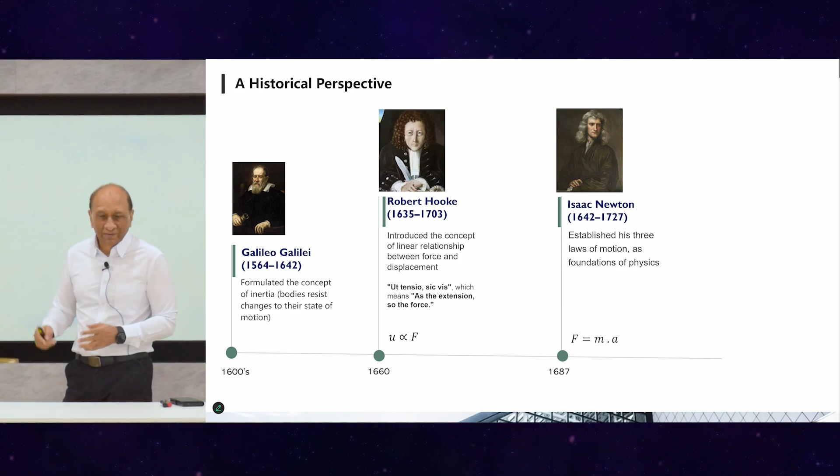And then came Newton. He formed almost the same time, different parts of the world, and formulated the first equation we all know, correlating his idea with the previous ideas, saying okay, force is actually acceleration, the movement are related by this function, that force and acceleration are related by mass, and they're related like this. This is of course the fundamental equation we all know now. This is the start of real physics in a way, and also engineering in some way.

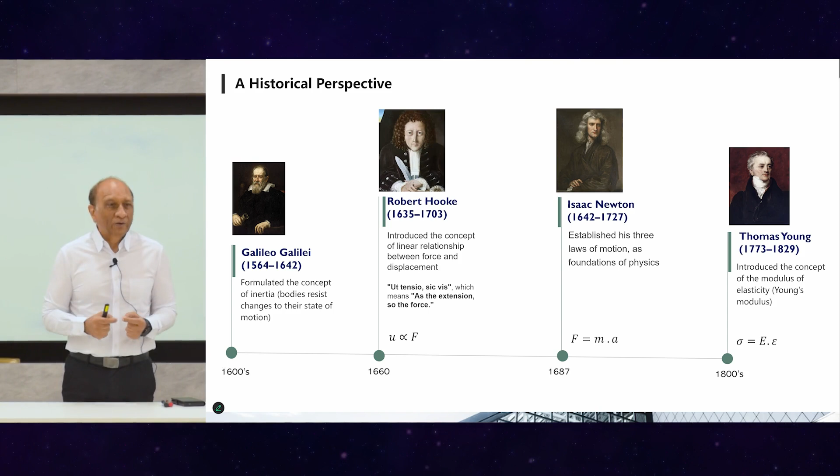And then this guy came nearly 200 years after that, a long time in history. Imagine, 200 years -- now it's 5 years, you can't even, 1 year you can't even read what's going on. 200 years passed between that idea and his putting this equation there, correlating stress and strain, and finding the Young's modulus as a relationship between them, and finally having an equation, finding that stiffness between that. So he started the same concept, but looked at stress and strain in a similar manner and came up with the relationship. This actually led to the equation F is equal to KU in a way, because this idea and that idea put together give us the equation, so-called Hooke's law, or the Hooke's equation, or the stiffness equation -- that force and displacement are related by stiffness, and stress and strain are related also by stiffness, called Young's modulus, or E. We discussed all these things in the previous class. This is just a quick historical perspective on how these things developed until the 1800s, and that's where things start to move very fast.

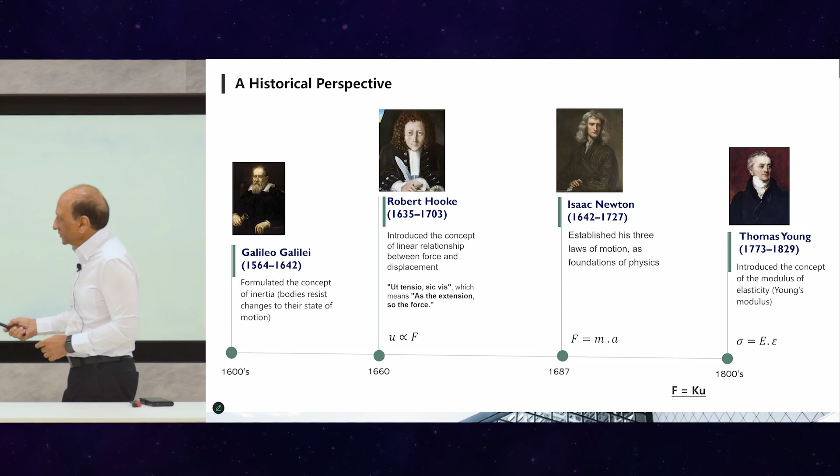Let's go back again. Let's look at a body -- I'm talking about physics now, 10th grade or 8th grade or whatever. It's moving as a mass, and if you want to move it from 0 to something, you will need to have some acceleration, and that is given by F is equal to ma. And A is a derivative of displacement. So now they're thinking about acceleration, but engineers are thinking about displacement, so we like to think about acceleration as a displacement derivative, second derivative.

And then we also have the displacement of a static system. This is a system in motion -- it's not in equilibrium, it's moving, so it's not equilibrium. And then we have the equilibrium where it is not moving, but we have the force here, and we also have a force here. Here we are restraining it from moving, so a force is generated. And then displacement and force are related by the stiffness of the system that is standing.

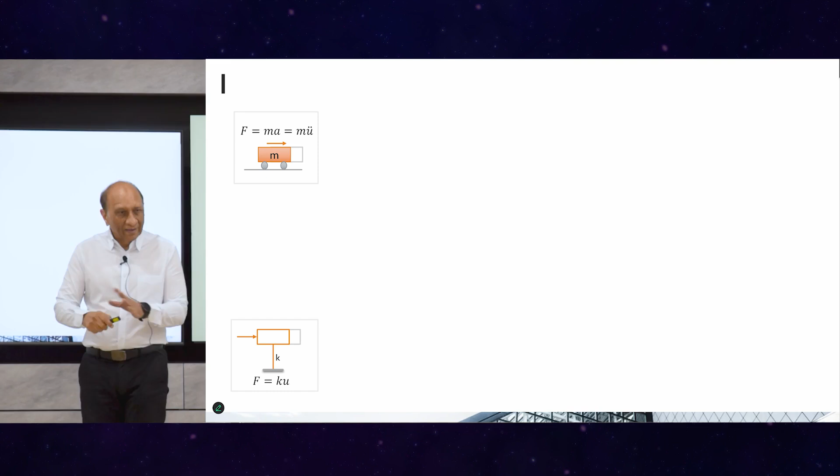So now you can see here the two are completely opposite. One is moving, a rigid body, and the second one is a body trying not to move because it's fixed and something is holding it back. Here, the mass is holding it back as inertia. Here, the stiffness is holding it back because it's connected to ground. So these two systems are the first one -- again, engineer's view and physics view of the motion.

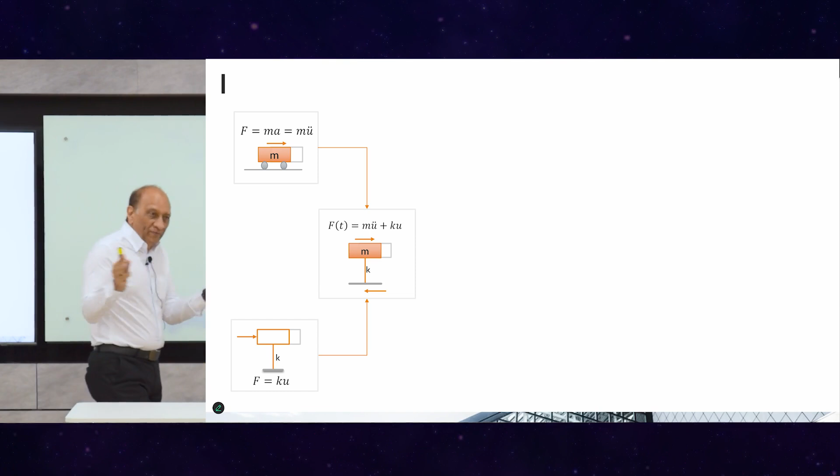If you combine them together, you get this equation where mass times acceleration plus stiffness come together. So now we are saying that the body is not really free to move a lot, but it's free to move within that rapidly. It's not slowly moving, it's rapidly moving, it's accelerating, but it cannot go too far because it's connected to the ground. So now the force has two components: the mass and acceleration component, and the stiffness and displacement component.

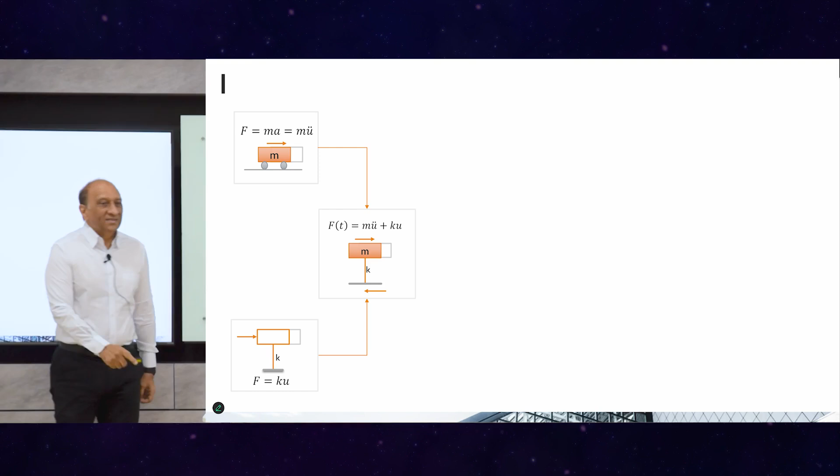So now we have the total equilibrium, but it's in equilibrium now. It's a dynamic equilibrium. But this is still a stick. K is still a stick, K is just a number. It's not representing a real physical system. It's not a column, it's just a stick with K. It could be anything, it could be a spring, it could be whatever. So it's a concept, it's not a real body yet.

But if we make that into a real body, like a column, then it is made of some material. So when that column has stiffness, it will also bend and deform, and its material, its molecules will move. It will internally try to change something, and that will give rise to damping, because internally it doesn't want to change its structure. So the damping comes up. Now you also have damping of the restraining system coming up to hold it down. So it's not just a concept or a stick, but an actual member made up of material. So we have material damping. Other types of damping will also come, but the concept of damping starts from here.

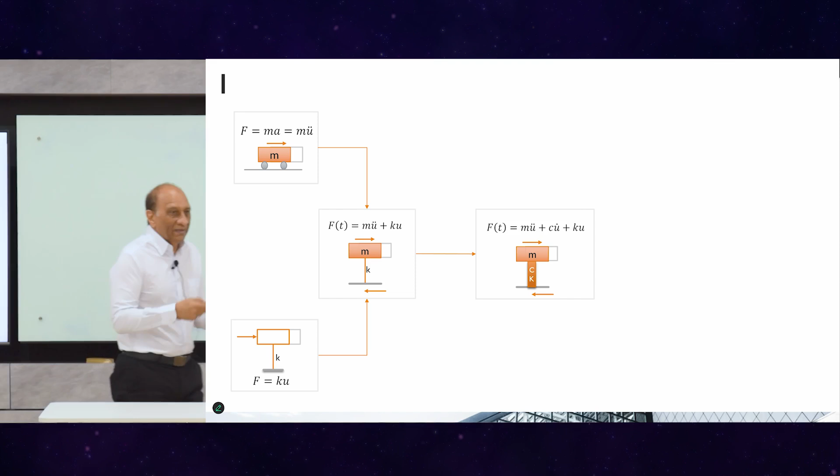Now we have a fuller equation of the force equilibrium, with mass times acceleration, velocity times damping, and stiffness times displacement. So now we start to build the dynamic equilibrium of a system which has all the basic ingredients of a typical structure. But still, it's lacking one thing. What is that? Something very important is lacking. Okay, if not, let's go on.

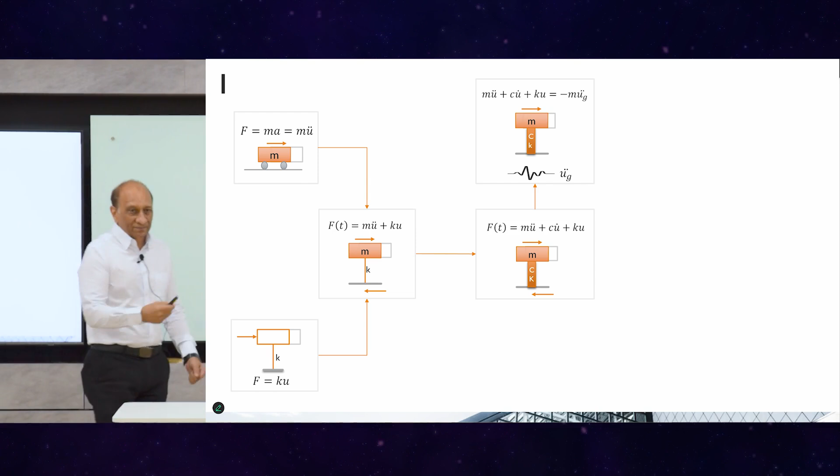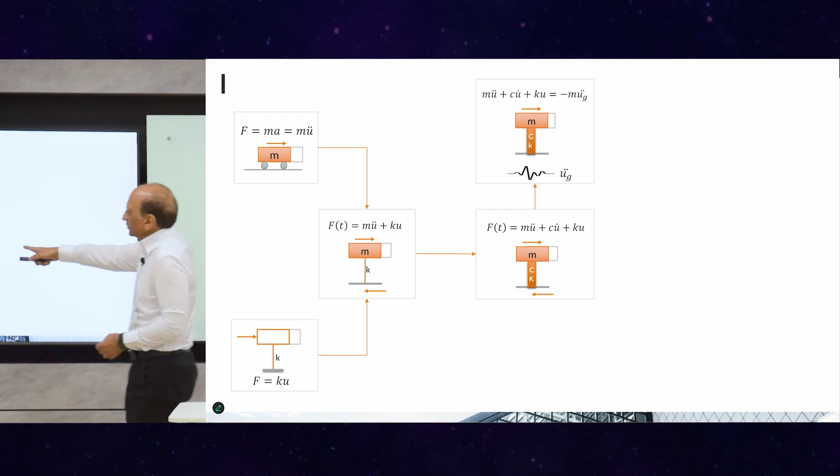Then people said, okay, what if the motion was because of the ground acceleration? Who's moving it? The mass could be moving by two or three ways: somebody attaching a motor or actuator and moving it, or it's on a shake table, or something is moving it rapidly. So if it's ground motion, then this force F(t), varying with time, is now related to the ground motion acceleration times the mass. So we have force coming from the movement of the ground. Now we have a ground motion equilibrium equation. This is a force equilibrium equation for forced vibration, coming from the ground acceleration or ground movement.

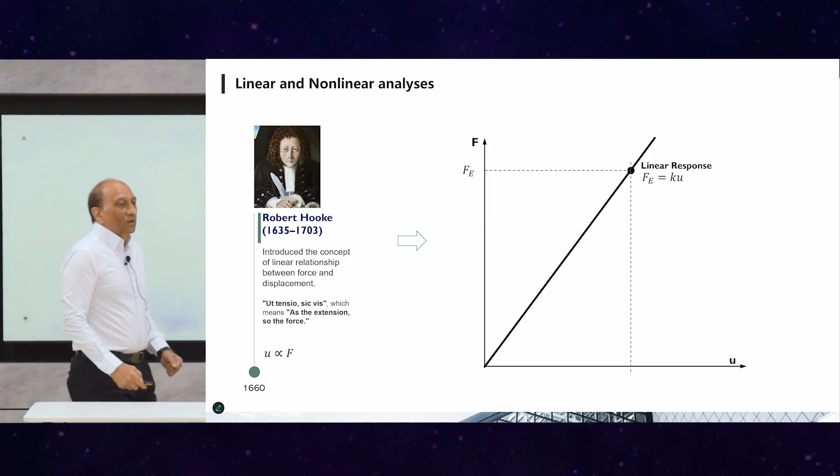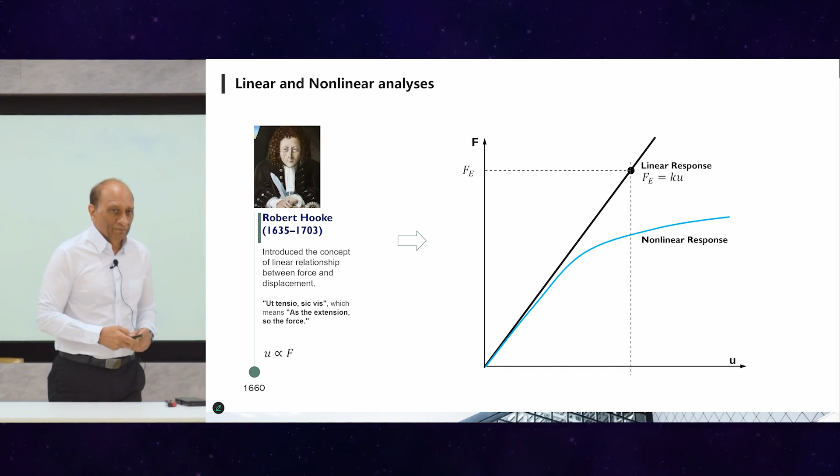But then observations proved that he was not right, because the actual response measured by people when they started testing things was like this—like the class project you did. When you tested the beam, it did not go that way, it went this way. So when people started doing physical tests, they realized that Robert Hooke's law is actually not valid all the time—it's only valid part of the time. And that's where the nonlinearity came in. So the blue response is the real one, and the black response is the assumed one. That means we have to go back and adjust our equations for this observation.

So we took this nonlinearity into account. Now at any given displacement—please carefully see this—at a given displacement u, there is a linear force coming from the linear equation, and there's a nonlinear force coming from the nonlinear response.

And there's a difference between linear and nonlinear response. That is a correction we need to make from linear to go back to reality, to the real response to correct that number. And we are looking for that number now.

It seems obvious that this is the difference, but the problem is the blue line is not known unless you test it and destroy it. So if the blue line is not known, we have to figure it out through iteration, searching step by step, looking for it in the darkness, trying to find where the blue line is.

So we need to have this correction, delta F, found somehow, gradually during the process. And then we have the force. Now force is equal to Ku plus the correction, plus or minus, depending on direction. That means we have to correct our equilibrium equation F, from the linear part to the nonlinear part.

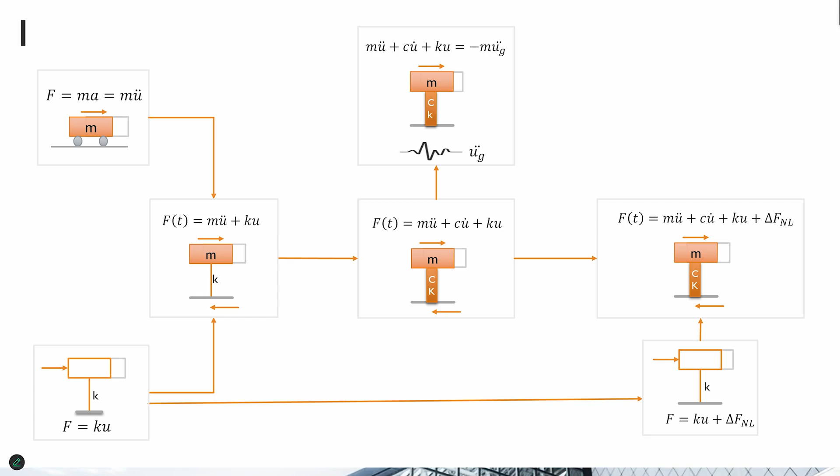Once we do that, then perfect. We now have solved the real structure's problem completely because we have considered everything that can be considered. Nothing is outside of this equation anymore. And then we combine this back to the ground motion - we have the full nonlinear dynamic movement equilibrium equation.

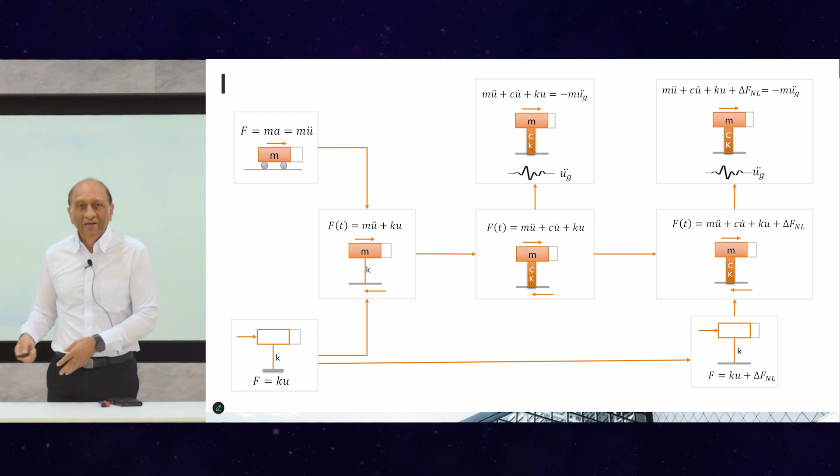So that's the summary of all the structural mechanics you need to know. Now we have the tools - many tools actually in this sheet - and we can use those tools selectively for doing many things, based on what information we have, how much knowledge we have, how many tools we have, and how much money people are paying us to do these things.

So let's look at this equation a little bit now, because we are going to do the analysis for seismic forces or even for wind, in a similar way. Then we expand that equation and see what we can get out of it, the final big equation. Just like we derived this for section analysis, this equation is the basis for all analysis. Out of that, you can derive so many equations by making simplifications and assumptions.

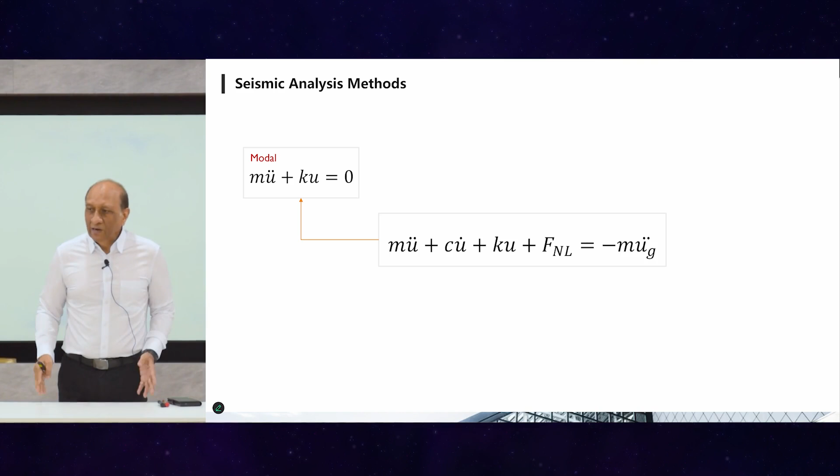First assumption is that there is no damping, no external force, no ground motion - thus the building standing there by itself. Building or structure standing by itself without forces, without anything, just pure mass and stiffness. If we take that out, then we get the modal response or free vibration equation from there.

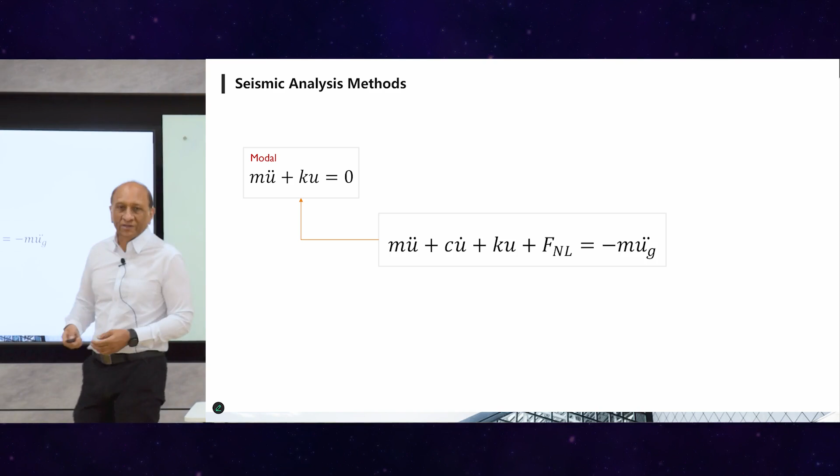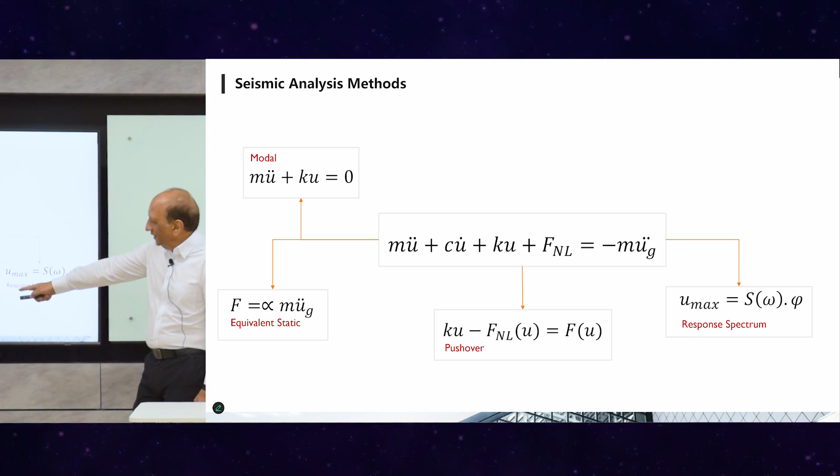And that will be converted to equivalent static, which I will show you later using response spectrum. Or in other cases, you can just convert that into an equivalent static force analysis. Then you can also do response spectrum from this one, which we will talk about, and then pushover analysis, linear time history analysis, and of course nonlinear time history analysis.

So every type of analysis that you do for any structure is right there in this slide and in this equation. So now all we need to decide is how much data we have, what kind of tools we have, and what we want to do.

In fact, in general, all of them will be needed. For a practical project, you will need to do almost all of them - response spectrum analysis, pushover analysis, linear time history, nonlinear time history, equivalent static, and definitely modal. So you will need to do all of these analyses to understand the full behavior of the structure, then compare and fully get a complete understanding of the structure.

So this is the sheet that we can now use as a reference to go forward today. And then we will discuss each one of them one by one, just a summary, because there's a whole subject behind each. So we have natural response simplified with factors, what the code is using.

The codes use this formula to do the seismic force, equivalent force design. They give you formulas and factors to calculate this. If we ignore nonlinearity, we get that. If we ignore inertia, we get pushover. We get response spectrum by maximizing maximum response. Then the real one is here, so everything else we do is an approximation.

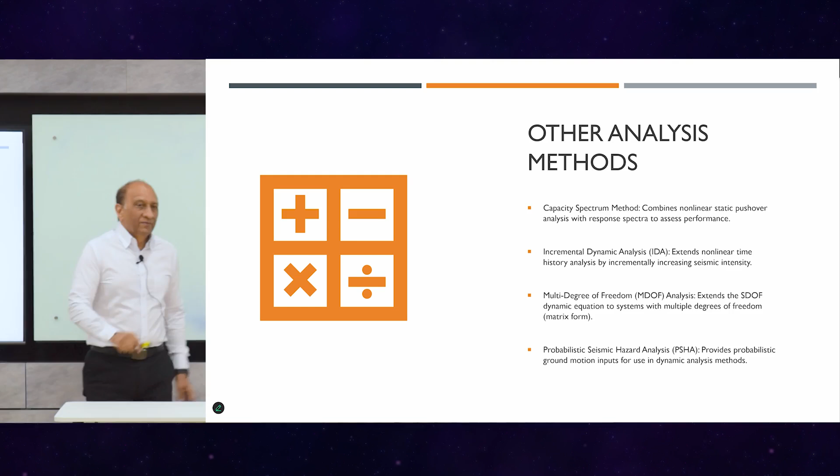There are other analysis methods: capacity spectrum, incremental dynamic, multi-degree, probabilistic, and many other concepts, which we will discuss gradually. So the picture is not completely complete; there are other things also attached to or related to that.

Let's go back again to understand this basic equation once again, and then see what we can do now step by step. This is the conceptual system: there's a mass, a spring with stiffness, a damping, a force, and then you have this equation that represents the basic dynamic equilibrium. That's the image you must have seen in so many books: external force, mass times acceleration, damping times velocity, and stiffness times displacement, plus a nonlinearity correction.

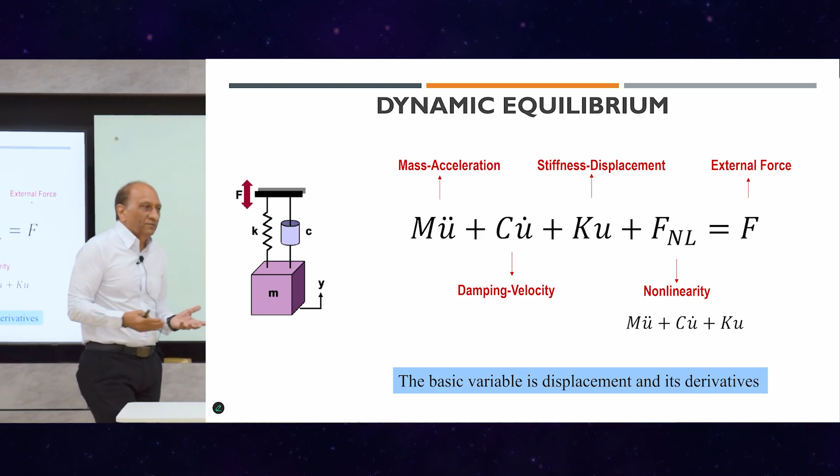And nonlinearity itself may look like this. Nonlinearity may come from stiffness, damping, and even other sources. Mass is normally not nonlinear, but it can come from changes in damping or stiffness. Both stiffness and damping can change with displacement, velocity, or acceleration, which means they are also nonlinear. So nonlinearity is contributed from this whole equation being inside itself—that's the definition of nonlinearity, that the solution is embedded in the solution. That's why you need iteration to solve this.

So let's get back to dynamic analysis of tall buildings and see some of the things now that we have the fundamentals summarized.

So where's the doctor in this? You're all too young, probably you don't go to the hospital as often as people like myself or older people have to—annual checkup, which I do every two years. But the first thing when you go, they ask you to sit down and let's take your pulse, measure your heart rate and blood pressure before doing anything else. Even if I have to show my teeth, they'll still want to get my blood pressure and heart rate first.

The first thing from the patient is to do that. Heart rate—many of us now wear devices to measure heart rate when walking, sleeping, or doing something. Heart rate is so important, it's one basic, simple indicator of everything. If you know the heart rate—there are stories about old doctors in villages who didn't have anything else, so they would just put their fingers on the pulse, and from that they could diagnose every illness in the world. True or false, we don't know, but that's what they did. Some had the capability to just measure the heart rate and its variation, and they would know what's wrong. That's the experts—they just look at one thing without tests and know what's going on. And now we have doctors who do 30 tests and find nothing because unfortunately they're not looking for the right thing, or too many things.

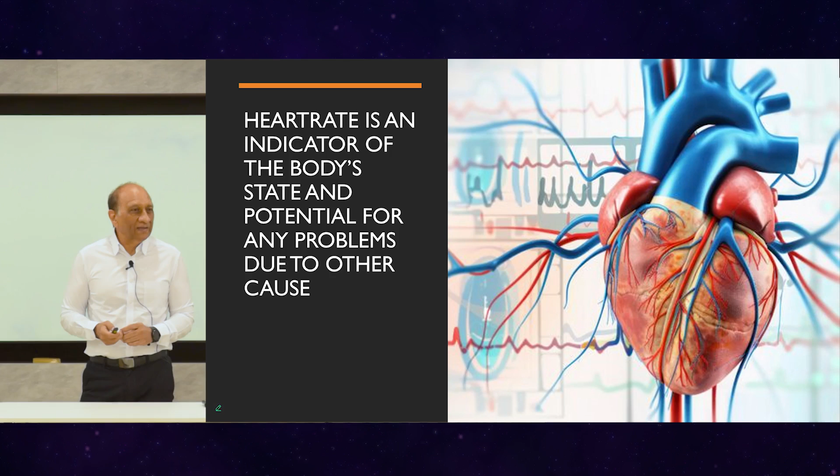So let's look at the heartbeat of the structure in the same way. And the answer is clear: it's here, the modal response. Because this is the pure and simple structure, nothing else—just the structure by itself, sitting down, not moving, just wanting to be measured. That is the heartbeat, which is the modal response. You determine that by stiffness and mass and nothing else. Once you do that, everything else can depend on that. So let's get into that, the modal response.

To get the modal response, we delete everything from the equation and go to the basic equation. This is then solved in many ways. There's math involved that you all know, so I don't want to go there. This is how it's somehow solved, and it results into two things that give you tons of information. I could have 3-4 hours of discussion just on this topic, but since we don't have that time, I'll just summarize.

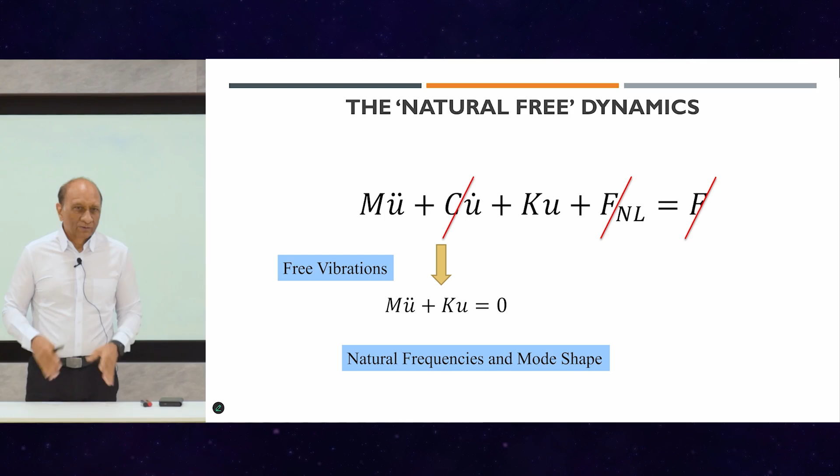Natural response, or the modal response, is the heartbeat of the structure. It indicates the stiffness and mass relationship, because it only has those two properties. It determines the relationship between these two basic intrinsic properties of the structure. If it is physical, it must have stiffness and mass, which means you can determine the relationship between them, relatively stiff or soft, heavy or whatever, from this.

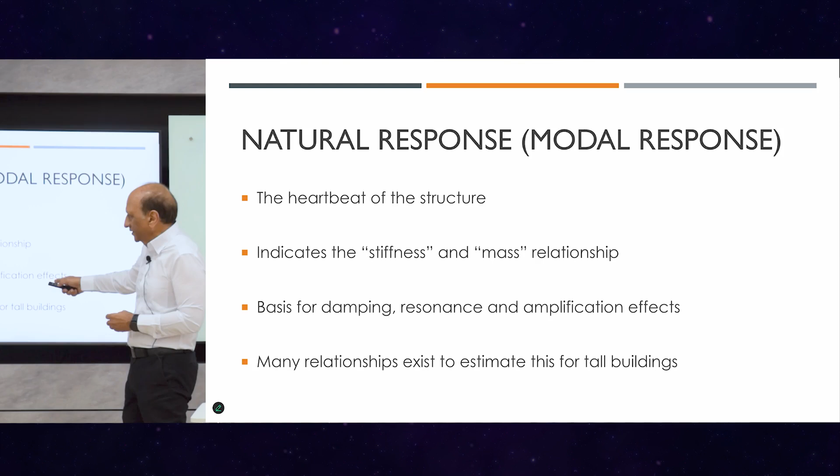This is the basis for damping, resonance, amplification, and all the other effects that can be calculated from there. There are many relationships available to estimate this for tall buildings, from tests and simple numerical methods, so people can guess based on data collected from thousands of buildings earlier. And of course we can also calculate it.

So modal response relies on three outputs that you can get. Number one, natural period. Natural period is the time it takes for the building or structure to complete one oscillation, one complete cycle of vibration, going from the original state and coming back. That time taken, in seconds, is the natural period.

Frequency is the number of these oscillations in one second, the reverse of natural period. So you get the frequency from that. Some people like to use frequency - mechanical engineers use frequency - but we prefer to use natural period.

It's more indicative. And then mode shapes, which is the deformation corresponding to the frequency, because the structure can deform in many ways. For every vibration possibility, there's an associated natural period or frequency, so that shape of deformation, the mode shape, is connected to that frequency or natural period. They come as a set.

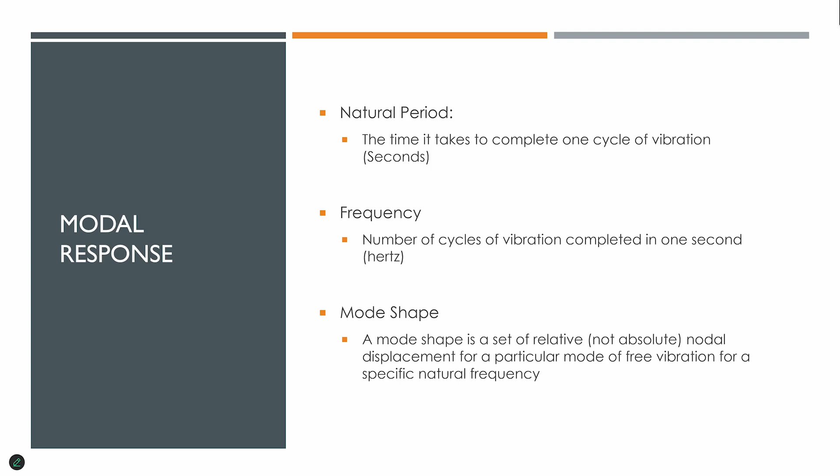We get this information from modal analysis of that equation, and the natural periods and mode shapes are inherent properties of the structure. So these are properties of the structure that do not depend on loading.

Do they remain constant? Does the natural period of a building remain constant? Over a period of time, damage will change the stiffness, and that will change the natural period - that's how you measure how much age there is. It's like carbon dating of fossils - the same thing. The dating of a structure can be done by measuring its response.

There are as many modes as degrees of freedom in the system. So if there are a million degrees of freedom, there are a million modes. Not all modes are important though. So our job as structural engineers is to find the significant, important modes, search for them, and integrate them.

Then local modes will come up. Local modes, which we'll talk about, are modes that shouldn't be there or are not important, but they give you false results - just like tests doctors do that get a lot of data that isn't important, because they're not looking for the right thing. These are the local modes that mess up the data and disrupt understanding.

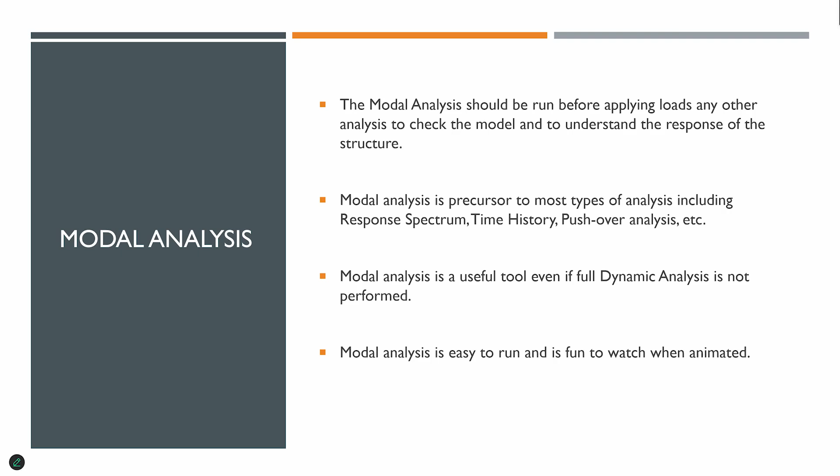For example, if you have a tall building with a small antenna on top, when you do the modal frequency analysis, that antenna will start to move first before the building moves. So the first mode will be the antenna mode, and some people may think that's the building's mode, which is not true. Then they wonder what happened to the first mode, because it's not the mode of the building, but a local mode of one part of the building. So many times this kind of thing disrupts the view.

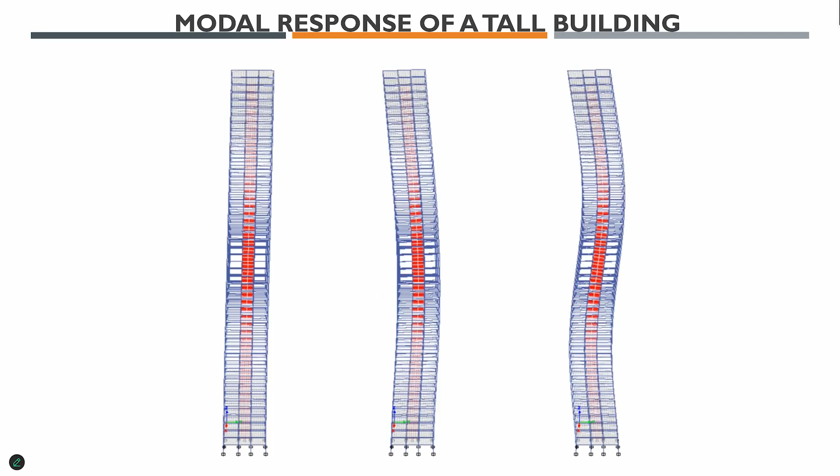Second modes now, you can see the form is very different. And third mode in the weaker direction. So first, second, and third mode, you can see the deformation patterns in each one, how the higher modes are now exciting a different direction. Three modes on the stronger direction. It's like dance moves, right?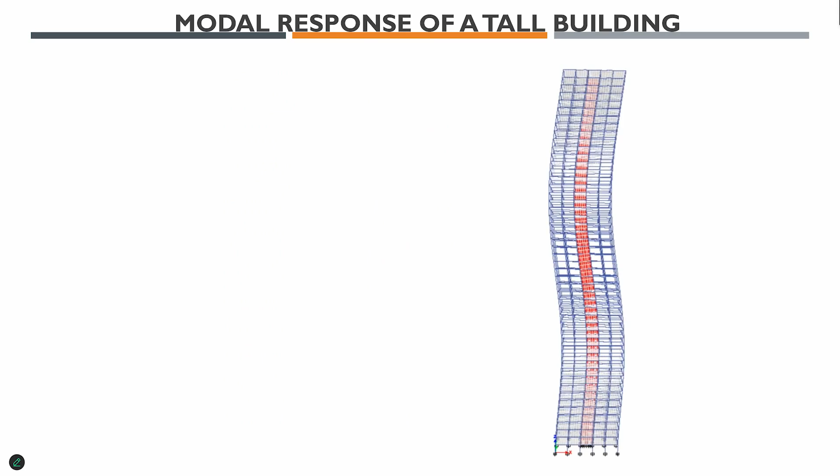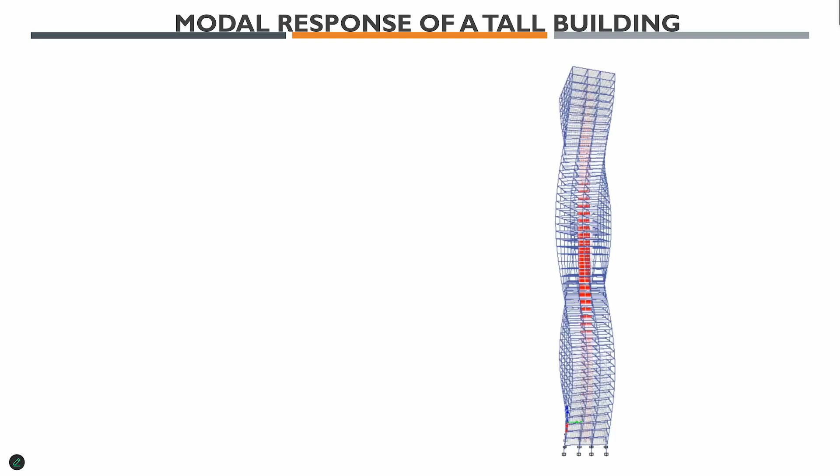And then the 3 modes in the strong axis. So far 6 modes, and then torsional mode, first one, torsional mode, second one, twisting, like 1970s dance twists, and then the third mode. So now you can see all 3 modes here.

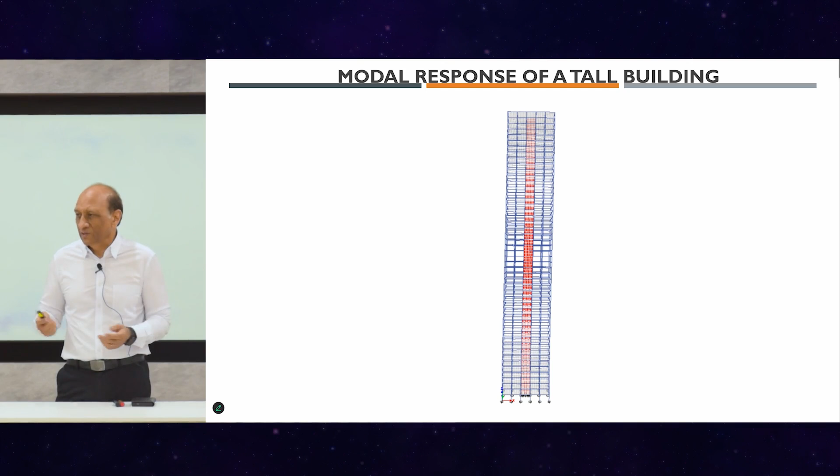The point is that these modes, as you can see, are fun, but they capture so much information. Their order, their magnitude, their shape, their sequence, everything has so much meaning. If you are looking for it, this is where all the information about the structure is. Like the guy who just holds the pulse and can tell everything, this is the one. If you know how to read the pulse, you are an expert. If you don't, you just look at them and say, what is this? It's just an animation, it has no meaning to you, it's simply the structure dancing. But if you have understanding, then a lot of information is hidden in this video, and you can later come back to explore that.

They exhibit the strength and weakness of the structure, and can be used to check whether they are within a reasonable range or not. Natural period, for example, you should have some idea whether it looks okay or not.

You can also see disconnected members. If the building has a beam that was not connected, that beam will move first before the building, and will start to animate separately. Some member which is not connected will have its own local mode activated before the structure.

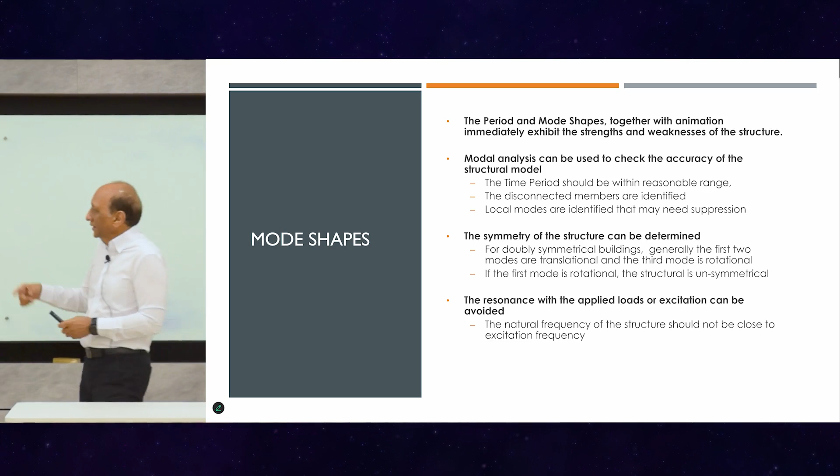You can see whether you forgot to connect one beam with the column, or the program did not model it correctly. Then local modes are identified that may need to be suppressed, like the antenna. You may have to set the frequency so that it doesn't include the antenna in your analysis, because that's going to disrupt things. So you look for the right modes from that.

The symmetry of the structure can be checked, whether it's a symmetrical or unsymmetrical structure, because a symmetrical structure typically has this order: weak mode, strong mode, torsion, weak mode, strong mode, torsion, in second, third, fourth, fifth, and so on. If that sequence is broken, that means the building is unsymmetrical somewhere.

And if the first mode is rotational, the structure is definitely unsymmetrical. Actually, not true - let me correct myself, which I always do, say and then correct. For a perfectly symmetrical structure, it's actually possible to get a torsional mode as the first mode in certain situations. The rule is that if the structure is symmetrical, the first mode should not be torsional.

But in a perfectly symmetrical structure, it's possible to get the first mode as torsion. Any idea why? If you have a very weak framing outside and a very stiff wall in the middle, the building will start to rotate about the wall because the rotational stiffness is too small compared to the bending stiffness, since bending is prevented.

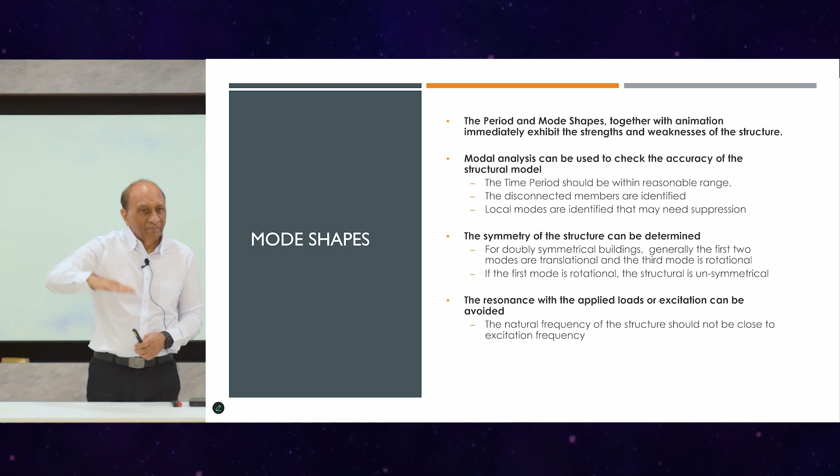Then, resonance from applied loads or excitation can be avoided. This is like that collapse I showed you, where people were jumping and matching the natural frequency of that stadium last time, and it collapsed and fell down. So the load frequency versus the natural frequency must not match.

You know this well. If you're in the army, when marching as a group and arriving at a bridge, you must break step, because your marching frequency could match the natural frequency of the bridge and break it. Those kinds of things are based on resonance, again coming from understanding natural frequencies.

This is a typical symmetrical building, showing weak direction, strong direction, and torsion. This is an unsymmetrical building, where the first mode is torsion.

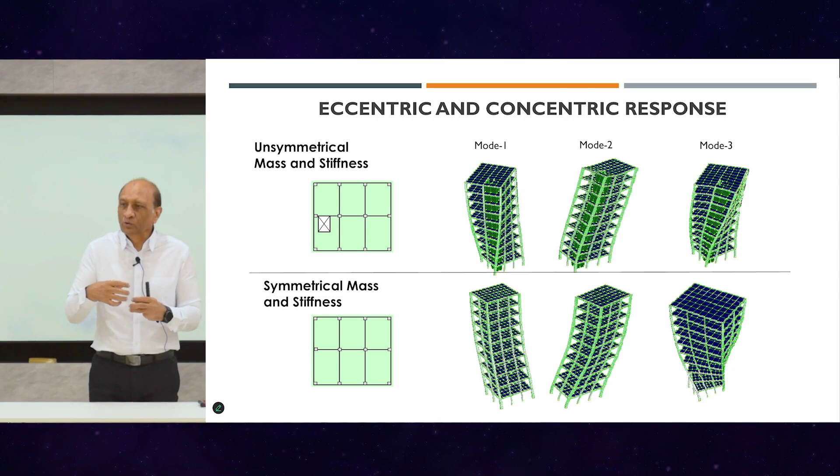A building will start to twist if the stiffness center and mass center are not at the same location, giving an unsymmetrical response, so the building tends to rotate. Stiffness and mass are the only two things, and they have to be at the same location for the building to be symmetrical. If you move the mass out, there is eccentricity and torsional mode comes in. If you move the stiffness out, same thing. So mass and stiffness eccentricity must be very small or zero.

This is one way to check whether the building is going to respond symmetrically or not, by looking at the modes.

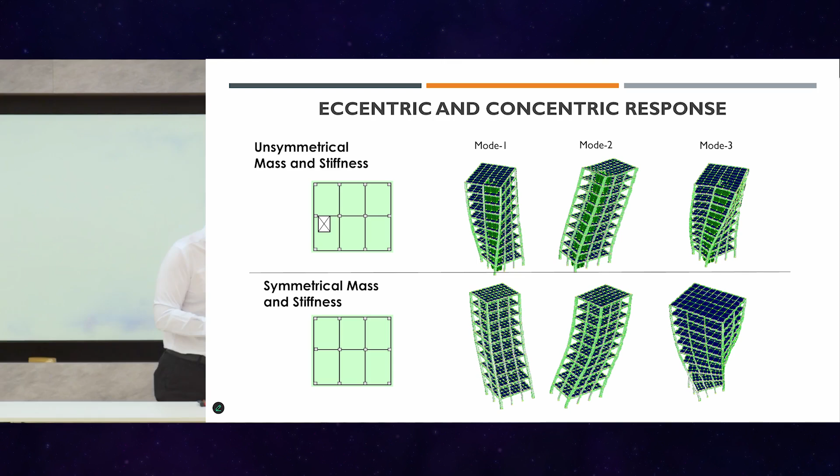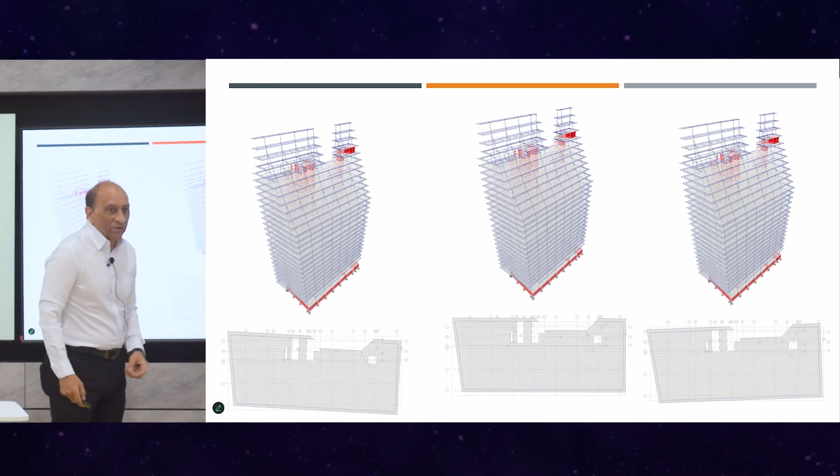This is another real building, and you can see three modes: first, second, third. The first mode is a little bit torsional because the shear walls are at the corner, not at the center, causing the building to twist in mode 1. Mode 2 is more or less correct. The third mode is again torsion. So if two out of the first three modes are torsion, that also means the building is pretty unsymmetrical.

That's how you quickly check the animations, and you should come up with very good information from that.

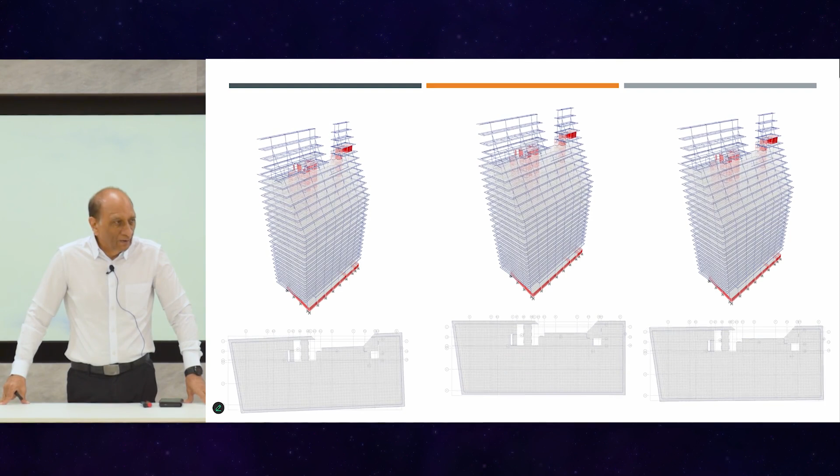Number two, the mass participation in that mode, meaning how much mass was moving in the building to cause this mode, because not all the mass can move for each mode. If it's a simple building, a cantilever or small structure, the first mode will move all of the building. If it's a frame, 100% of the mass will move. But if it's a tall building with complex configurations, some mass is not moving in each mode because the modes are complicated and the building is very tall, stiff, and big.

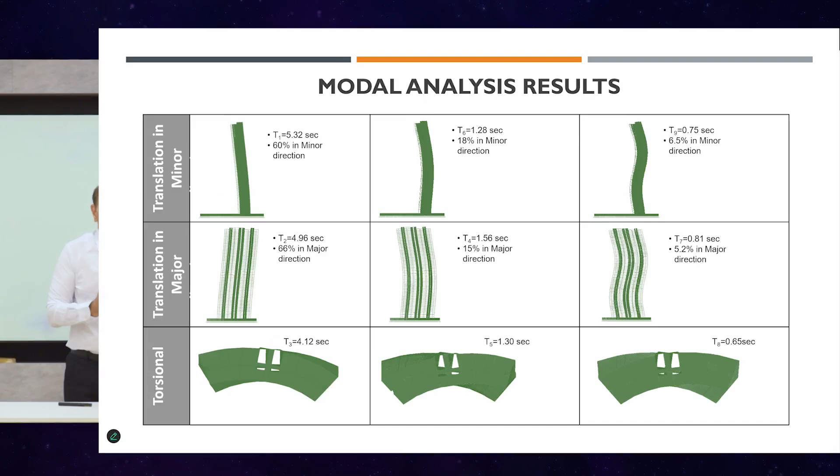So 5.3 seconds is pretty long for a building to move, around 5 seconds to complete one cycle. It's pretty slow, so the building is moving very, very slowly.

A building like this will not respond quickly to ground motion because it takes its time. The ground moves much faster than this period, so excitement to it will be very low. A short building, by contrast, has a very small natural period, so it responds very quickly.

It's important to know the natural period of the building. The typical rough rule is number of stories divided by 10, or 0.1 times n. So if a building is 50 stories, the first natural mode should be around 5 seconds. This building is 55 stories, and it comes out to 5.3 seconds. Very good design, looks good.

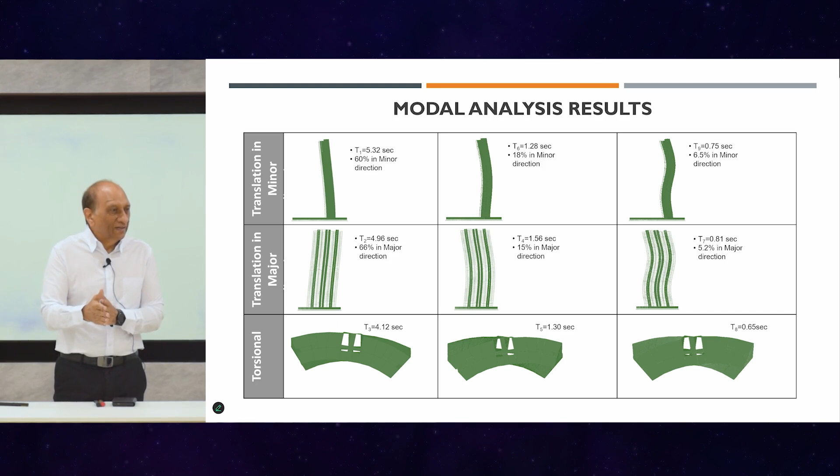It's moving in the minor direction, which is good, and 60% of the mass is moving. For the analysis to complete, you must collect enough modes to move at least 90 or 95% of the mass. So the first mode alone, at only 60%, is not enough. In each direction you must collect 95 to 100% mass participation so that you capture all the forces generated by the mass. In this case, the first mode is not going to be enough.

Now if I move in this direction, the second mode in the minor direction — this is T1. Looking at the sequence of natural periods given by the program, T2 is here. The second mode, as you saw in the animation, is in the major direction, the bigger direction, with a natural period of 4.96 seconds. Now, what does this number show? The mass of the building is the same, it did not change. So why did these numbers change in one direction versus the other?

There are only two variables: mass and stiffness. If the mass did not change, the stiffness must have changed, correct? Which means the stiffness in the two directions is not the same. This is a very important observation — it can tell you how much difference there is in the stiffness of the building in two directions. The building is weaker in one direction and stronger in the other, because the natural period is decreasing, which means mass is constant, so stiffness must be increasing.

The first direction is minor, the second direction is major, and in this direction the stiffness is more — I'm getting about 66% of the mass participating in that direction. So in that direction too, the first mode is not enough, because I need 95%.

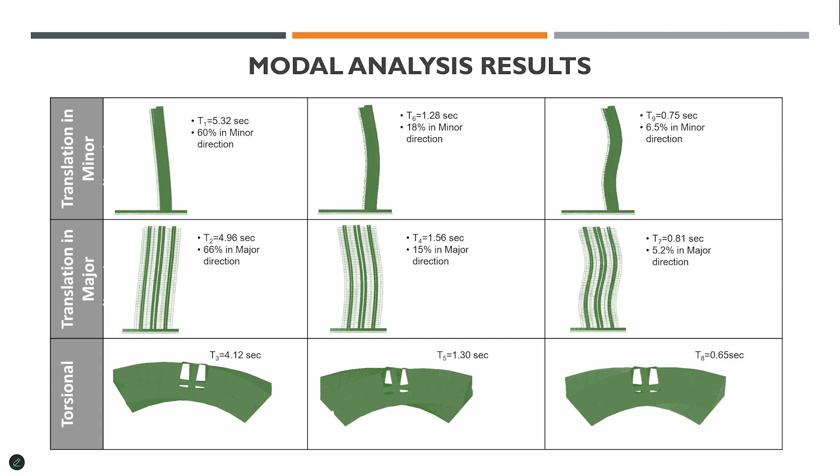Then this one, so this should be 1, 2, 3, 4, 5, 6. This is now mode number 9, should have been 7. Once again, same problem. That means in the minor direction, stiffness distribution is not as we expected or as we should get from a very symmetrical building. Okay, and then 7 here and 8 here, and then they are reversed again.

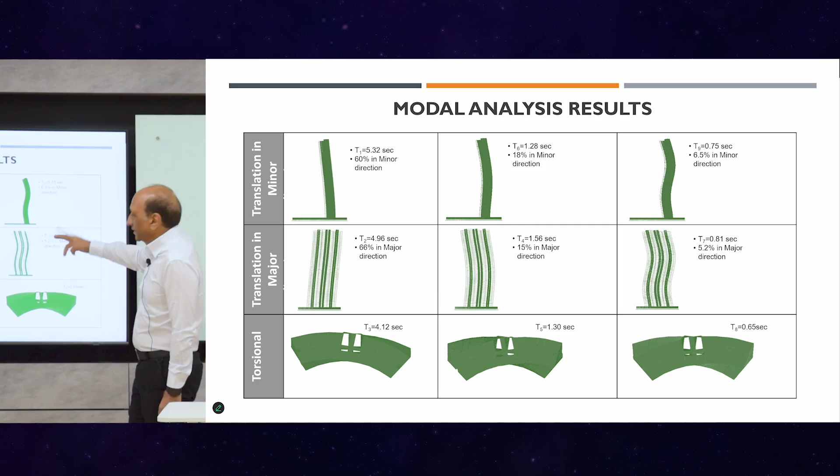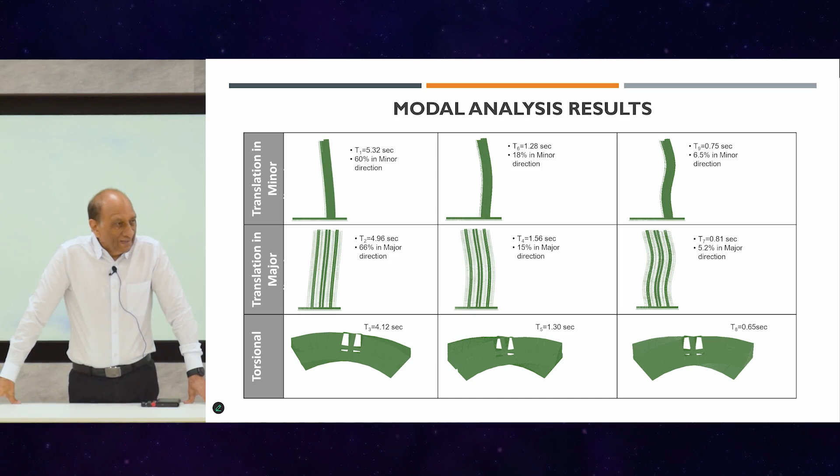So now this is the mode, double curvature, triple curvature here, and here the mass participation is 6.5%. So 78 plus 6.5, something like 80 something, did not reach 90 yet. That means we will have to go further to investigate this building into mode number 12, 13, 14, and so on, until we get enough modes to reach 95% modal participation in each direction. Sometimes we have to go up to 36 modes, sometimes higher. You keep going until you collect enough mass moving so that the seismic total force can be added up together.

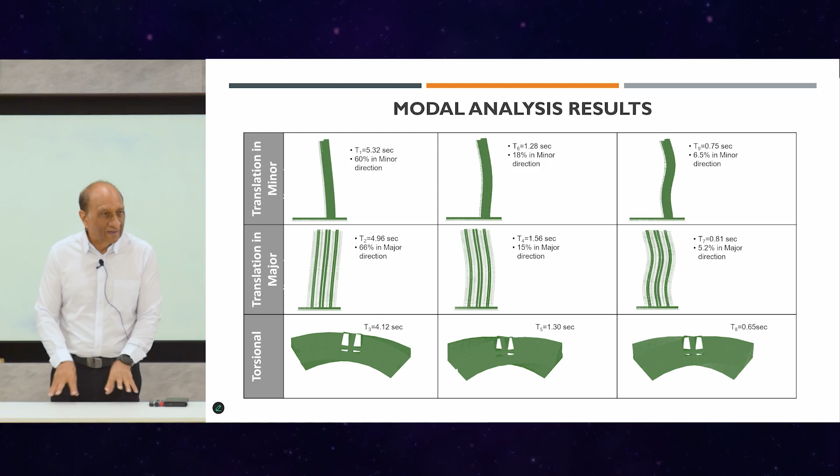But I will show you why that is important. Right now, I just want you to focus on this diagram and see how much information you have here. It's a lot more here. I'm going to stop for now, because we can come back to that, but please do not forget to make this diagram yourself and analyze it to understand what's happening.

Linear response to ground motion. Okay, we have got this one. This is the response of the building which was moving by itself. Nobody was asking it to move. Natural response. Every building is moving all the time. It is called natural. So no building is standing still. It's just that we don't measure them. But every structure is moving, and they're moving in most of these modes already. They are in motion, and we can always detect, we can always measure it.

That's the job. But what happens if we move the building, not because of natural motion, but now we move it by shaking the ground, and we just get the linear response. The building already has its own modes of moving. When you move it externally, it will only move in the modes that it knows, in the order of the stiffness that it knows. So you cannot make it move in any other way than its own modes. So the natural modes will respond to the ground motion and start moving in their own way. The structure will decide what it's going to do with this ground motion. So if you put three different structures side by side, as you've seen in shake table demonstrations, they will all move differently. Same ground motion, same everything, each structure will respond according to its own modal properties.

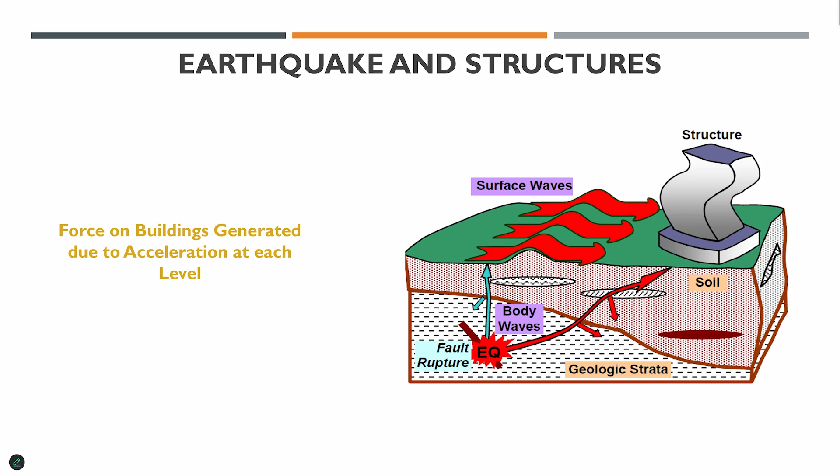So this is just, and then when the earthquake is transmitted, like I mentioned, on the way, what kind of waves will be generated? What is on the surface? What are the body waves? Where is the rock, where is the soil, how is the building, what is the structure? All of this will impact your structure's response. So unless you account for all these things, you cannot predict the response to earthquake accurately.

And the whole challenge is trying to find that out. Going back in history, in the 1970s, the codes first start to think about trying to design the structure for earthquake. That's the time they come up with these factors that will account for all these things - the K factor, the C factor, the I factor, the V factor. There were 6, 7 factors that try to account for everything in this diagram to calculate what will be the force generated by the earthquake. Gradually, they become more complicated. Then we say, okay fine, too many - why don't we just go to the real analysis, which I showed you earlier, this one.

So seismic analysis methods, we have all these methods now, depending upon how much information you can get. If you want to do this one, you need to get the ground acceleration. Where do you get that? To do the analysis, you need to have the ground acceleration. So there is a whole field dedicated to calculating, estimating, approximating, or predicting the ground acceleration on your building based on so much analysis.

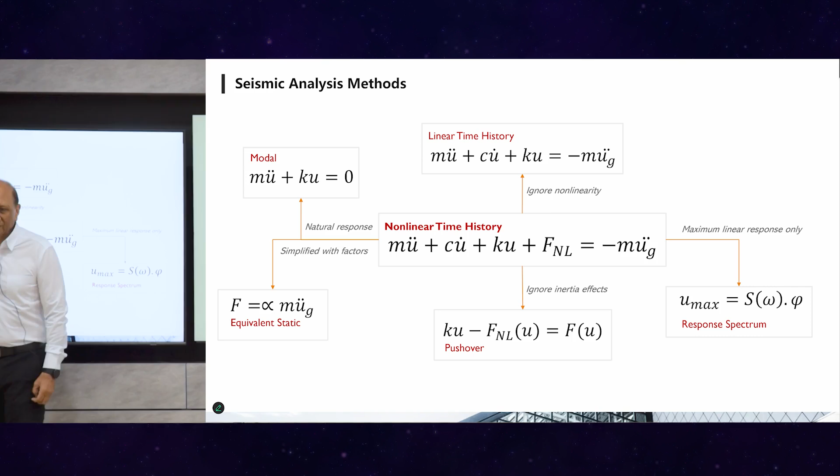When I was doing analysis and design in my starting time, 1982, our life was very easy. When I joined the company and told my seniors I wanted to design a hospital structure, I asked how should I account for earthquake, since this was in a high earthquake seismic zone, not normal in mountain areas, and a very important hospital too. He said, divide the weight of the building by 5. Done. That was all I had to do to calculate the total horizontal force on the building. That was the famous rule.

W by 10 or W by 5. If it's not a seismic zone, W by 10. If it's a seismic zone, W by 5. That was only one factor, the W by 1 factor.

That's all we knew back then, but since then things have become really complicated in this area. First we got response spectrum, then pushover, then linear time history, and now we have nonlinear time history. Let's talk about linear time history a little bit.

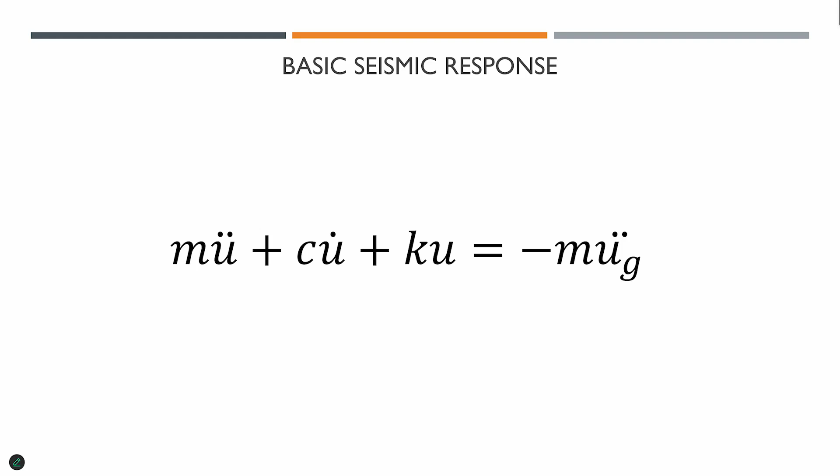Coming back to this equation, how do we solve it now? We need to find the displacements from this equation, because once we know the displacement, we can go back and calculate the forces. So remember, stiffness in this equation is very important.

Stiffness comes from materials, section, member, and structure - it's everywhere. So when you talk about stiffness, it's not just one number. Stiffness depends on the material, the section size, how many sections and members there are, and how the structural form is. Everything, including soil and foundation, comes into stiffness. So don't underestimate stiffness - it's very, very complicated to assemble and determine.

And this is just linear - a single degree of freedom system with mass, stiffness, and damping. This is the equation I showed you, and you can solve it for the displacement by many methods. I have no intention of doing the math, but just to show that this can be solved in this way for a single degree of freedom.

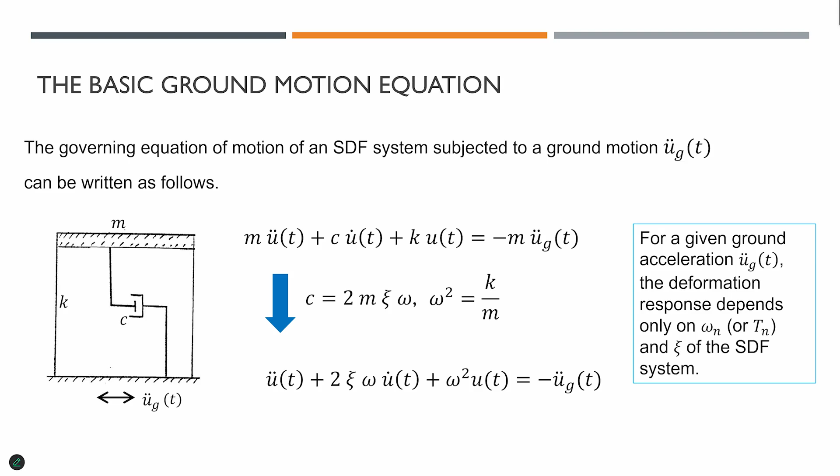From there, using matrices, we expand it to multi-degree of freedom. For a given ground acceleration, ü_g(t), the deformation response can be determined using two things: the natural period and the damping. Basically, those are the ultimate factors that come in - frequency or natural period, and the damping ratio. So you can simplify it that way.

So now we end up with only damping and natural period to determine, because mass cancels out on both sides of the equation. If you solve it properly, you end up with only these two things. So I can assume a certain damping, and then for different variations of natural period, I should be able to get the results easily from this equation.

That's what makes each building respond differently to ground motion, because each building's stiffness and natural period are different. Just because the natural period is different, the response to ground motion is different even for a single degree of freedom - for multiple degrees of freedom, much more different.

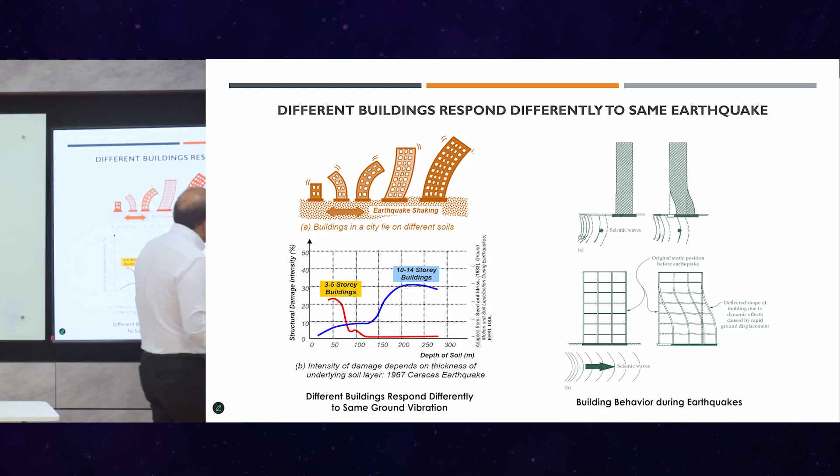This shows the response for a 3 to 5 story building versus a 10 to 14 story building, the way they deform and move - again from Professor Murthy's book, a very nice book. So it's quite clear that each building responds uniquely to the same ground motion, generating forces and displacements unique to that building. In the same city, every building will be different or nearly different.

With different scaling factors being added at each time. So the total response, because of what I showed you earlier, for a displacement for a ground motion is for a natural period. And because the building has different natural periods, each mode will be added together in different scaling factors.

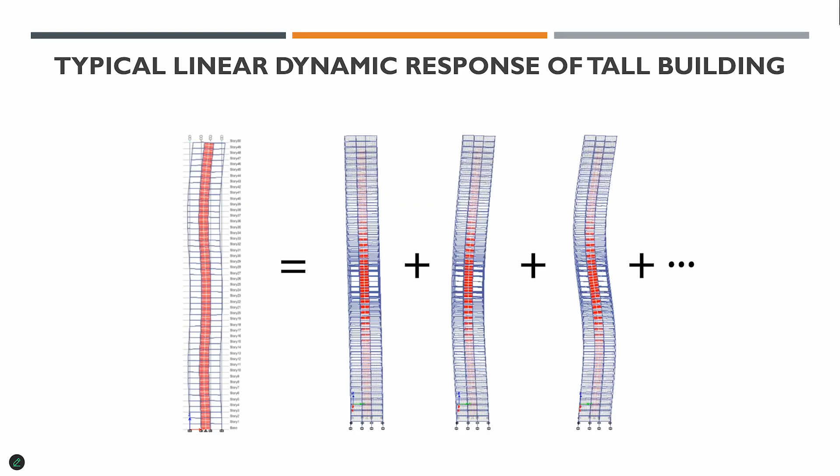So please watch this one. This is the real displacement for a ground motion, abrupt, random, and these are the individual modal displacements. They're all added together, and you get the summation. That's how the linear response of the structure to ground motion can be determined, primarily by doing this kind of ground motion solution.

Coming back to this again, if you have those modes, the total response of this building to ground motion will be a summation of all these complicated modes, all the way up to mode 30 to 40. So you can see how complex the response will be. Sometimes it's twisting, sometimes it's moving this way, sometimes it's moving that way, sometimes it's confused, it's not moving at all, and so on. This is how each building will be so unique, because even if the first mode of any building is the same, the second, third, fourth mode will not.

It's like a signature. It's like your biometric. So the natural response of a building is a biometric, you can compare it to that. It's like a DNA, because it's so unique. No two buildings, no matter how identically they are designed and constructed, will physically in the end have exactly the same natural response for all the modes. Even small variations will change them at some point or the other.

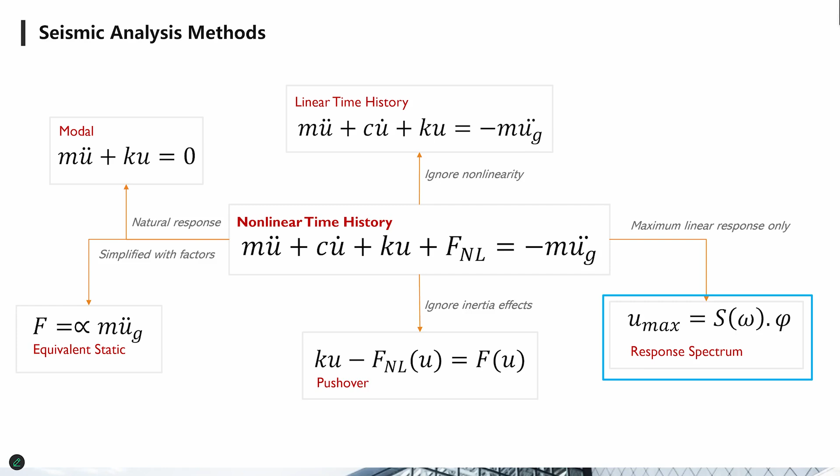So response spectrum, once again coming back to this set, is here. We're looking at the maximum response, and a spectrum is a collection of maximum responses from a ground motion or sets of ground motions. So when you have a ground motion, we actually design the building for a response spectrum representing something like this. Notice here there are three response spectrums, which you will study. One is called SLE, service level earthquake.

That means earthquakes that will come regularly, so to speak. And then DBE, design basis earthquake, for which the code has given you the mapping or the numbers. And then the MCE, the maximum considered earthquake at that site due to the tectonics and everything.

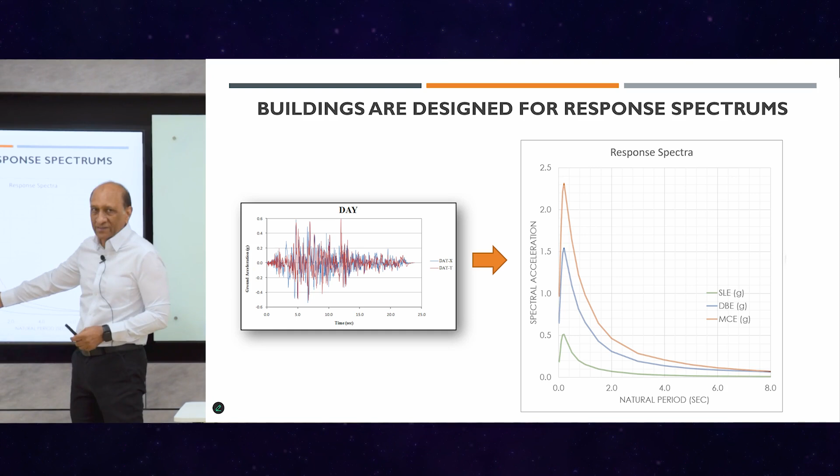So you have three response spectra. Normally there's spectral acceleration on this side, which is a factor of the ground acceleration, and the natural period on this side - natural period on this scale and spectral acceleration on that side. This is the basis for the seismic initial design, a first improvement over the equivalent static approach.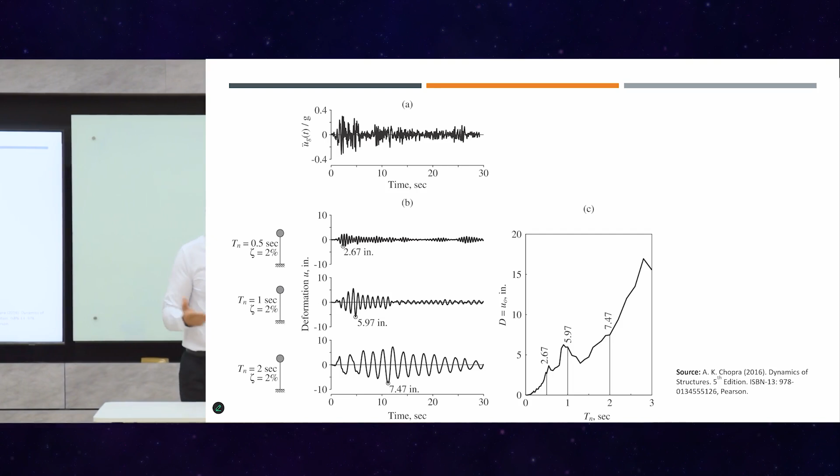And then you pick the maximum, 2.7 inches from here. From the second one, 5.9, and this one 7.4. You pick these different maximum displacements from each plot of the response from the ground - and remember, this is very important, some people miss this one - the ground is shaking at a certain acceleration.

If the building is rigid, like Newton's building, the building will move at the same acceleration as the ground. But a real building is not rigid, it has stiffness and damping. So when it responds, it responds in its own way, in its own sweet time. And this acceleration is the one that will cause the force, not the ground acceleration. A lot of people think that the force generated in a structure is the ground acceleration multiplied by the mass. That's not true. It's the acceleration of the building, or the mass at a particular location, with its corresponding acceleration.

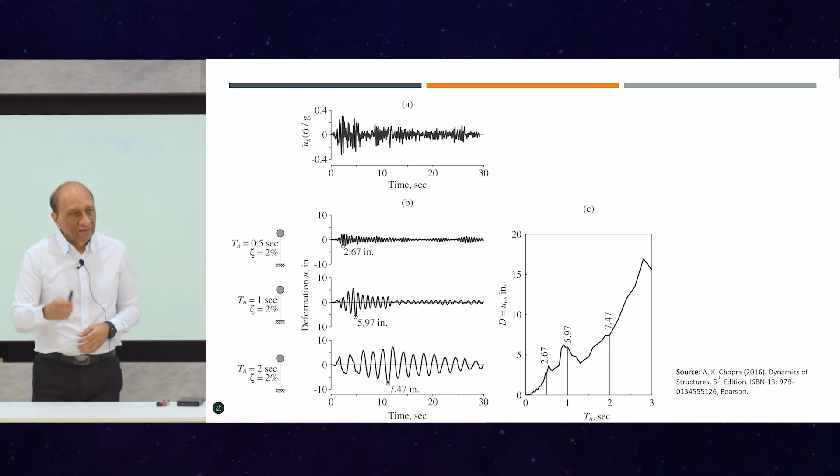So you do that, and then you can plot these maximum displacements against the natural period used in that equation. You get this curve. This is called the response spectrum. That means it's a spectrum of the maximum displacement for a particular ground motion with different natural periods. We use this as our basis, and we did not care whether they occurred simultaneously or not. Actually, they didn't occur at the same time, but we still use them. This is the simplification from dynamics to equivalent static, because we remove the time. We just pick the maximum through the entire time history, and we draw this one. Then from this spectrum, you can read the peak value.

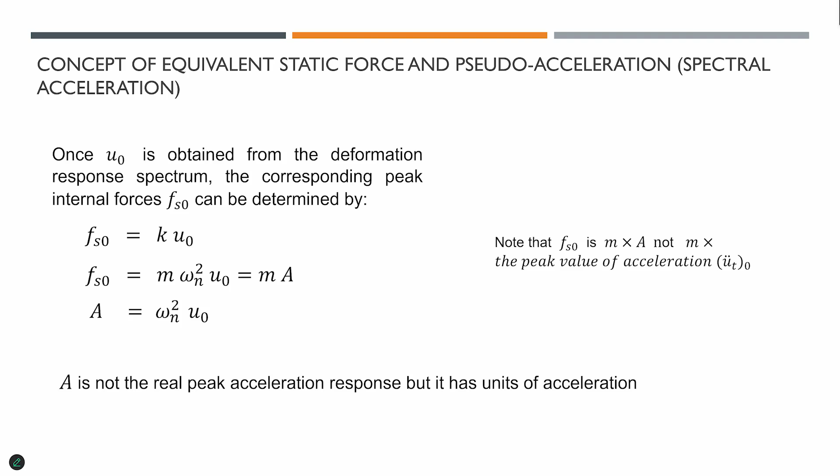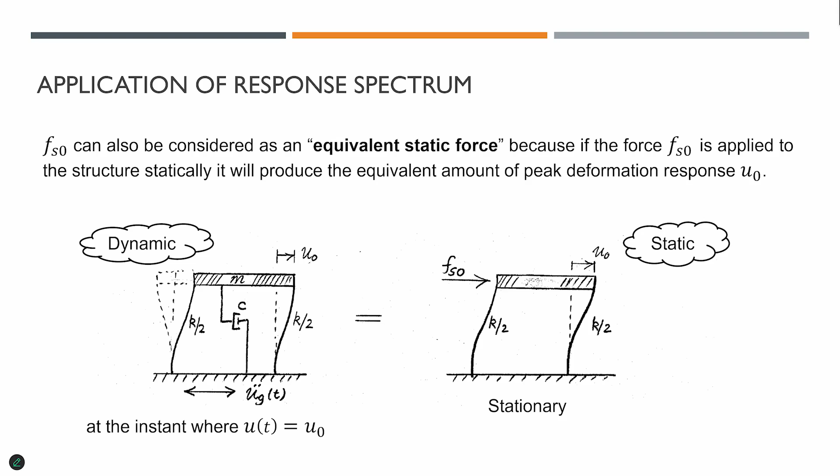So you get this one, and then you can calculate back the forces, because displacement is known. From displacement, you can go back and calculate forces, and then from that you get the building response. That's the way it will be solved: from the response spectrum, you convert it into a force and solve it. But this force is now coming from a more accurate estimation, rather than my estimation of W by 5 or W by 10. Now this is unique, coming from the modal analysis and response spectrum, natural period, and everything is embedded into this one. And multiple modes can be done now.

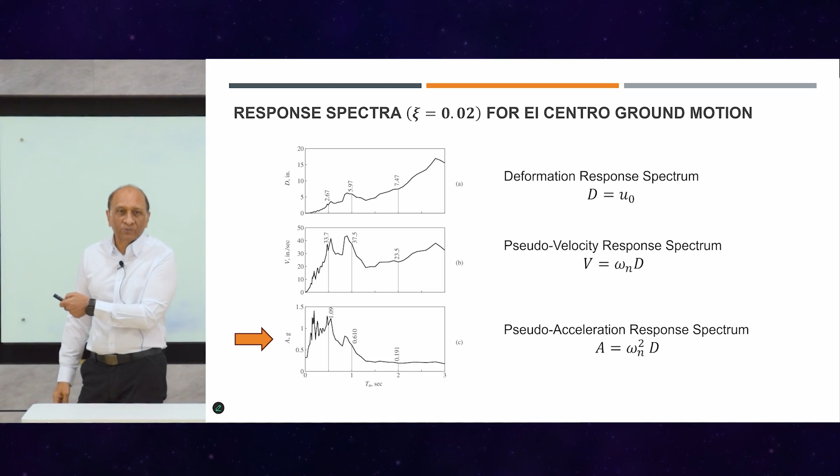So once you have that, you can plot acceleration, velocity, and displacement, and from that you can get all these things. They're all based on spectral, pseudo-spectral acceleration, not the true acceleration. Then you can plot them all in a single graph with 3 different axes. This is typically how the codes show you. If you go to the building code, every building code in the world has a figure something like this, showing the response spectrum for buildings with different natural periods and the expected acceleration divided by the ground acceleration for different soil types, because now soil type comes into play, among many things.

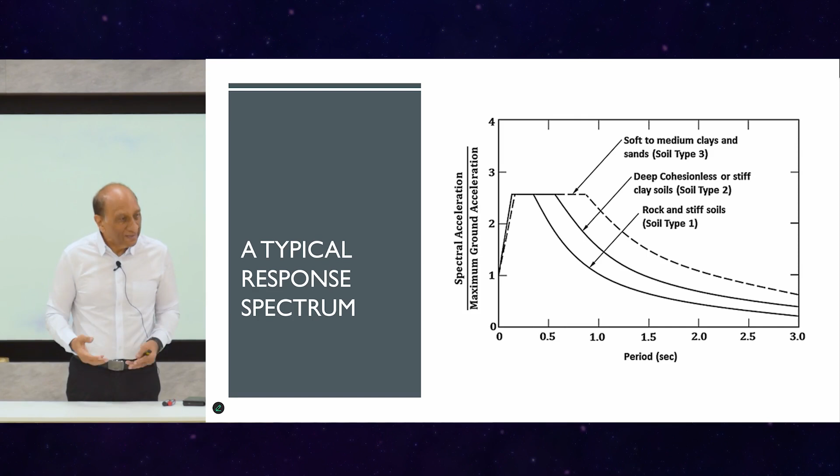So this becomes the basis for estimating the forces on the structure, using linear time history converted to response spectrum, converted back to force. That's the whole idea: you can just give the natural period and go back and get the response without doing the time history, because you already generated it. But that is based on a single degree of freedom system, and then it is extended in that way.

Okay, so now this is interesting, the last 2 slides, then we end on this subject. This is an interesting interplay of the response spectrum with the natural period of the same building in different modes. Please watch this carefully.

Two response spectra are shown here together. This is Bangkok, the yellow line; the blue line is Philippines. This shows how much stronger the seismic demand is in the Philippines compared to Bangkok. That's the first thing you can notice — Bangkok is very low, Philippines is very high. But look at this: for buildings with a natural period close to 0, that means in the Philippines, if the building is 1 story, the response will be very high, about 1 G, as much as the full ground acceleration.

I'm trying to interpret the blue line first. If you go to about here, which is about a 10-story building, the response will be 0.7 G. So the force generated in a 10-story building will be about 70% of the mass force generated for a 1-story building. Of course mass is different, but I'm talking about the proportional relationship.

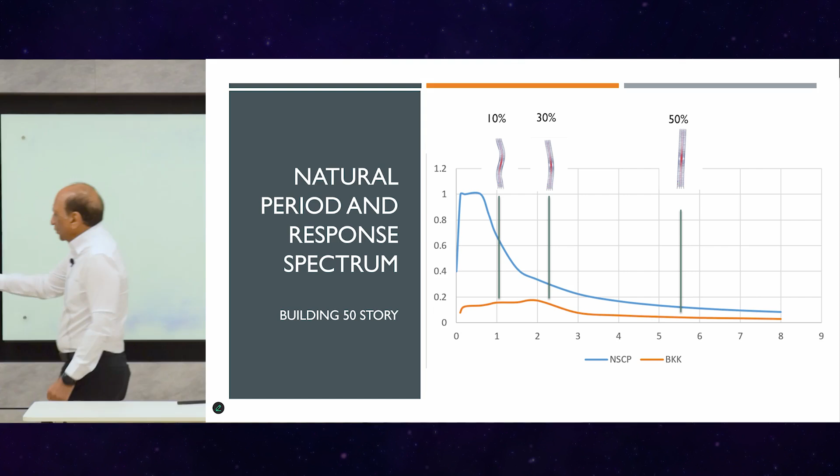When you go to a very tall building, 50-story, it is only 0.2. This means for a tall building, a very small fraction of the mass actually produces the lateral load or horizontal force. For a small, low-rise, 1-story building, it's almost equal to the ground acceleration, the G. That's a good thing and not a good thing. If for a tall building all of the mass was converted to force, it would be impossible to design that building. It just won't work. That's way too much force.

You can't. Lucky for us, or whichever way, it drops down, because as I mentioned, due to the natural period, not many modes participate. The first modes do not contribute so much.

But now for Thailand, Bangkok, the response spectrum is like this. For a low-rise building, it actually starts low and rises up to about a 20-story building, and then drops again. This is a very unique response spectrum, only found in Mexico and here and a couple of other places because of the soil characteristics, the basin.

Here there's a basin which is very soft, and the rock is very deep. So the ground acceleration coming here is already diluted in some way, because the rock is moving here, and the soil building is here. By the time it reaches here, it needs time.

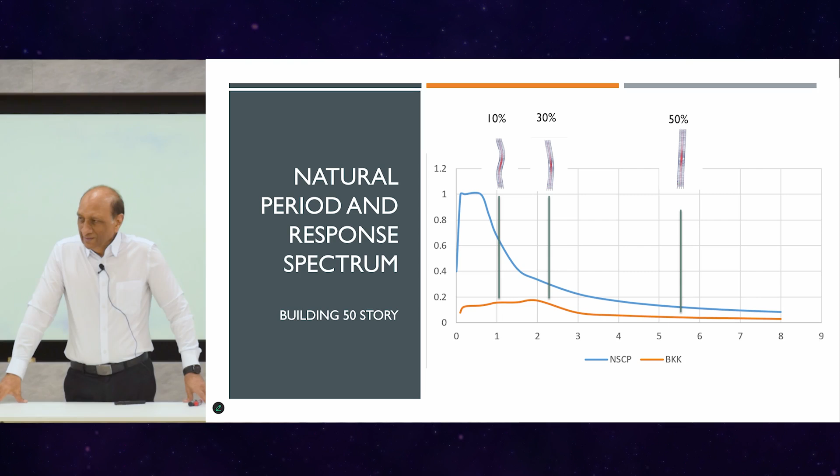So 20-story buildings appear to be most susceptible in Bangkok comparatively, then low, below, and above. This has been proven in many recent events. And then it goes there.

But the thing is, for the very tall building, the difference is much lower than for low-rise buildings. So here it still has comparatively large forces compared to the difference here. Here, the difference is very large, 8 times, 4 times. Here, maybe 2 times.

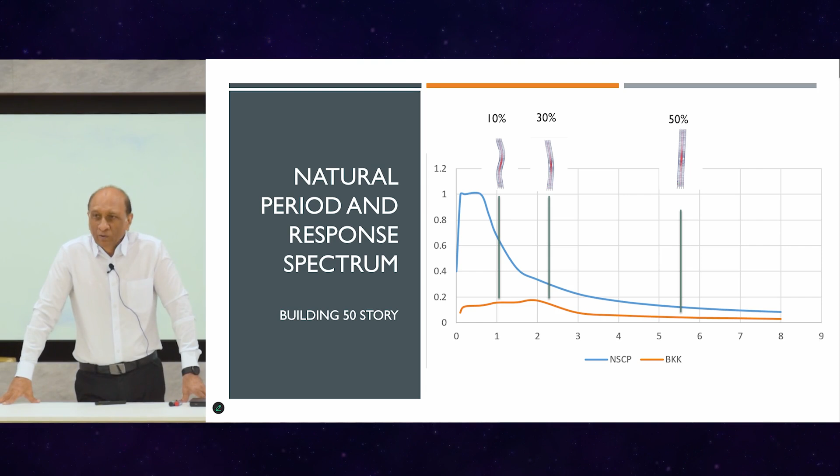So which means even if a zone doesn't have strong earthquakes, in general, tall buildings will get a similar level of forces. This is something people do not immediately recognize. Not similar, but not significantly different. You can see here, this is 0.1 and this is 1, so 10 times. So a one-story house in Manila will get 10 times more force for an earthquake than in Bangkok.

But a tall building, 50-story, this one will get 0.2, this one will get 0.15 or something. So only marginally less. It's not just the seismic demand, but also the building's natural period that will govern what happens.

Another important thing: this is mode number 1 for a 50-story building, at 5.5 seconds, contributing 50% of the mass. Because this is the first mode of the building, 50% of the mass is participating in this mode. That means 50% of the mass will be multiplied by approximately 0.18, a fraction of the ground acceleration, to generate the force roughly. So you get the force from the mass in the first mode as this blue line multiplied by the 50% of the mass.

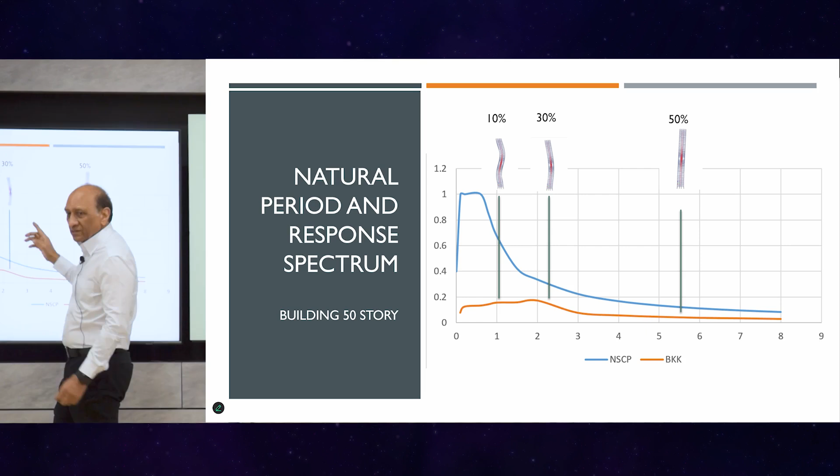The second mode is 30%. That 30% will be multiplied by a larger ordinate of the response spectrum. So even though it's 30%, less than 50%, the contribution to the force may be higher because we're now on the higher side of the response spectrum curve. Then the third mode is 10%, but we are now very high, getting more effect from that factor multiplied by 10% of the building mass. That's how things are added up. So the higher modes may contribute more to the lateral force generated on the building than the lower modes, because the response spectrum over there is very low.

Now let's go to another case. This is another building, only 25-story high. The first mode is already taking 80% of the mass, already at a higher ordinate. Then 15% is very high, and 4% is almost at the top. So 4% of the mass is multiplied by that, 15%.

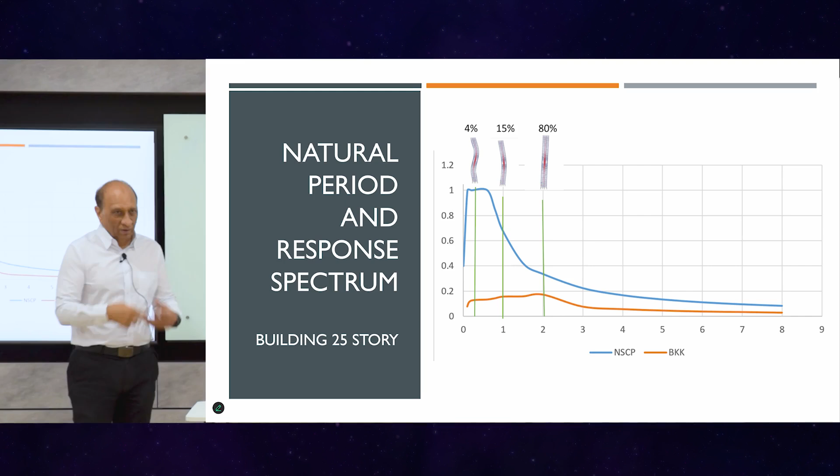But look at the same building in Thailand: 80% with the maximum ordinate. So obviously this building will get more force, and then higher modes have less effect because they are now on a declining part of the response spectrum. So the statement that higher modes contribute more is also related to the response spectrum shape. It's mostly true, but not always true. You have to look at the interaction between natural period, response spectrum, mass participation, everything together.